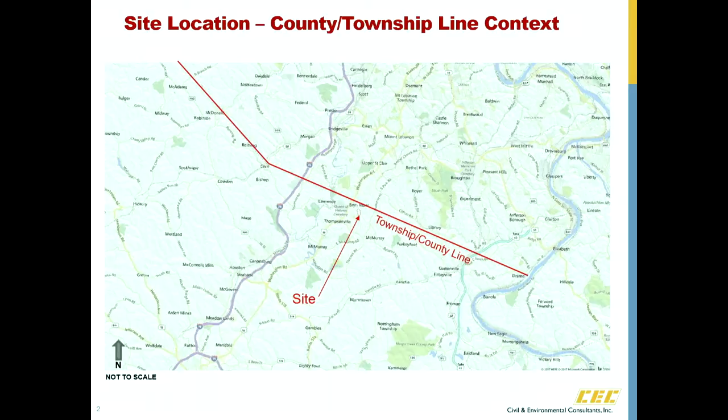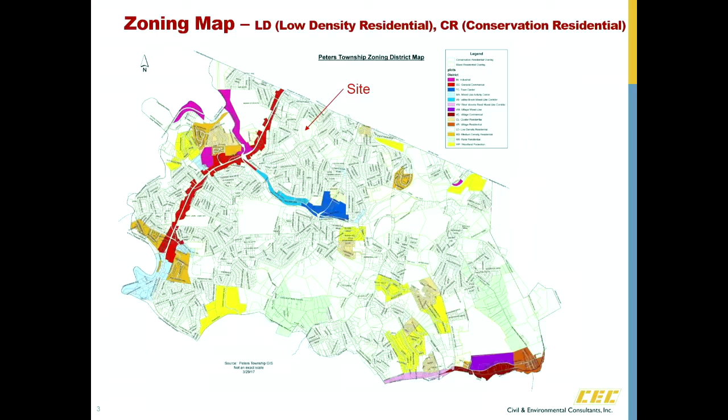Thank you, Ed. Thank you, commissioners, for having me here tonight. Once again, my name is Bill Moldvin. I represent Woody Welsh, Briarwood LLC, in the land development approval process for the Juniper Woods residential subdivision. Quickly, I wanted to refamiliarize everybody with the location of the site. The site is on the northern end of Peters Township at the township and county line, Upper St. Clair, Allegheny County, Washington County, right here. On the zoning map, as Ed mentioned, the site is in the low-density conservation residential overlay district, and this is the parcel of land right here, 30.4 acres.

Existing conditions. This is north orientation. South is here on the southern end of the property, Thompsonville Road. The northern end of the property is the Beacon Manor plan. Existing conditions, primarily wooded. There's an existing gas easement bisecting the property from east to west, and then the southern portion is woods and open space lawn.

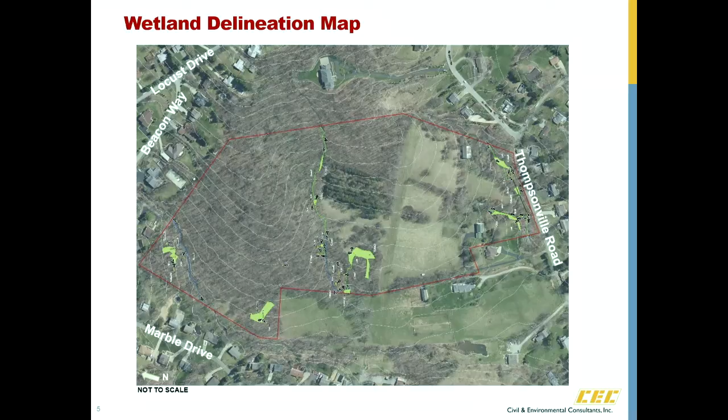We did do a wetland and stream delineation, which found multiple wetlands on the site and 7 streams. We've designed the plan to have one impact to a de minimis wetland, which is below 0.05 acres. That's going to be impacted with one of our road crossings, and we're currently in the permit process with DEP to have those stream crossings and the wetland impact permitted. And topography, the high side of the site is on the eastern portion, and it heads down towards the western side. So you can see we've got a pretty significant elevation change from east to west.

Zoning information, I think we've covered that. Property is 30.4 acres, as I said. We're proposing a yield of 60 units. Option A in the Conservation Residential Overlay District requirement states that we have to have 25% of our gross site set aside as permanent open space.

We're providing 11.08 acres gross area, and I put in parentheses the previous plan, the preliminary plan. When we came in, we were at 10.95 acres of gross open space. We've increased that by about 1/10 of an acre, and our net acreage of open space is 9.35. We were at 9.02 in the preliminary plan, so we're up almost 1/3 of an acre, and that net area is calculated from the gross minus any of the areas encumbered by easements.

Site design requirements, we've chosen to use the narrow right-of-way configuration in the zoning ordinance, which measures 40 foot from back of sidewalk to back of sidewalk. We're looking at sidewalks 5-foot width, both sides of the road, except for the locations where we are crossing streams to limit the impact to those streams, basically minimize the length of pipe culvert for those streams in conjunction with that crossing. Front yard setbacks are 20 feet, side yard setbacks 7.5-foot minimum, and corner lots are at 15 feet.

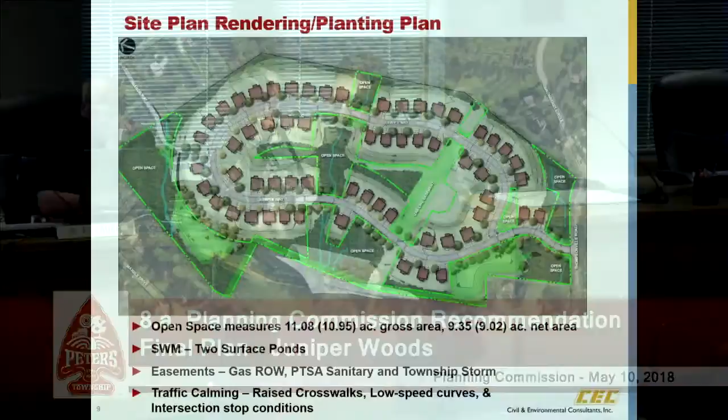We had initially assumed the 50-foot assumed floodway on either side of the stream, and found that going to DEP with those impacts was going to look unfavorable, and we were able to do a preliminary hydraulic and hydrologic analysis on the streams to determine the actual floodway or floodplain, and it varies from location to location. I think we had maybe 26 cross sections throughout the site, but at that location, where the stream comes into the property from Beacon Manor, our floodplain was less than 10 feet, so less than 5 feet on either side of the stream bed.

And we did work with the township to develop multiple concepts that either graded on both sides of the road or had a retaining wall on both sides of the road, and considering DEP's permit requirements, the most appropriate way was to grade on one side and install the retaining wall on the other. I guess my concern is it feels very narrow. If this has been reviewed by staff, fine, but it just feels very narrow, and I'm concerned when we actually build it what the impacts of that street will be. And if something tips us into a DEP permit, that's obviously a very significant permit.

Yeah, and we've actually met with DEP prior to submitting the permit, had a pre-application meeting to discuss the project as a whole, specifically the Manor Way connection, and got their feedback on what they were looking to see to stay outside of that DEP permit process. I just see that note, road connection to Manor Way to be coordinated with the township. Makes me nervous. We're going to be on the hook for something. Makes you nervous, why? Just for permitting and constructability of that retaining wall. Just want to make sure we fully vetted that roadway, that it's going to be constructed and we get the permits for it. We're in that process now. Okay. Key moving forward will be working with the property owners.

I think a few sections perpendicular to the center line would be very helpful to understand. We have all of that as part of our permit application to DEP. We have cross sections at every crossing, both in line with the stream and perpendicular to the stream. Specifically, I'm concerned that the stream we're encapsulating with a retaining wall that has a return on it is really going to act like a big catchment for any debris. And we know we have difficulty cleaning out those culverts, and that could be an area we're constantly maintaining. So point out where that stream's being encapsulated on that map again. Right in this location. About how many feet? This one's between 90 and 100 feet.

And the culverts have been designed to convey the 100-year storm without causing any water backing up onto adjacent properties. Retaining wall as well. We've discussed a cast-in-place concrete retaining wall and a segmental block retaining wall with geogrid. From those catch basins there. Yeah, it's extending it. And that's just about perpendicular to the flow of that stream.

So are these homes on pads or are they going to have basements? Some will have basements. Well, no, they'll all have basements. I apologize, they'll all have basements. So has this area ever flooded before? Manor Way area? Except on that stream, down on the vacant land now, the wooded area. I'm not aware of any major flooding issues on Manor Way. Never. Never, as long as I've lived in one. These are all small watersheds as well. They're less than 100-acre watersheds to all of the streams.

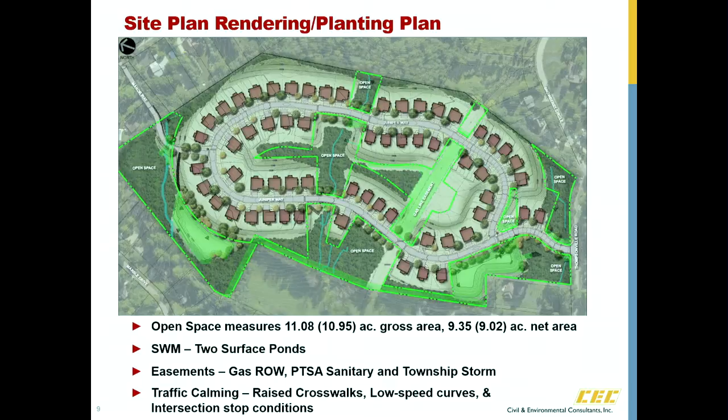And they have been good about trying to preserve what we have in regards to the environment, not encapsulating the entire stream. Still concerned about the number of vehicles. This was brought up at the council meeting, about a right-of-way that was originally there that supposedly doesn't exist, but it does. If you look at open space, I'll just point to it. When Manor was put in, this right-of-way was left there but never accepted. Is that correct? Correct. So nobody owns this. It's been 35 years. Its intention was to do exactly what we're doing here.

Just a what if? I don't think so because of the topography and the environmental constraints. There's wetlands. I don't know. There is wetlands there, I grant you, but I don't know that we would be permitted to make that connection under DEP rules. So you don't know. I don't think it would be used, even if it was available.

Okay, well, if you can put up the one graphic, Bill, that shows the wetlands and that spot. Sure thing. Nope, back. Okay. I don't know that this shows the wetlands. Yeah, it does. Wetlands here. Okay? This is the right-of-way right here. And you're going to plan a culvert of 100 feet, correct? Yes. It's going to be like right here to accommodate the road on the map.

The culvert is going to be 100 feet by 70 feet or whatever it is. If it's possible to slide this culvert down a smidgen so that the road can bifurcate, the culvert becomes an intersection, and now you access a right-of-way. I'm not an attorney, I just fixed them.

But I did find this, Sabotis versus Carley, PA 258, 1978. I'll just get to the conclusion: mere non-use of a right-of-way by its holder, no matter how long continued, including 21 years, cannot manifest an intention to abandon the right, because there's no legal obligation upon the right-of-way owner to use it in order to keep his title to it. We don't own the right-of-way. But there is precedent, and there were several citations here, that even if you didn't use it and didn't abandon it, that doesn't mean you can't get it.

I'm going to disagree here, and the only reason I say that is that we have asked our solicitor to look at these questions of these right-of-ways, and there is no question that the township has no ownership interest in it, and that right-of-way that had not been accepted by the township has reverted to the adjacent property owners. What Mr. Kittleberger is correct about is the township could, if it wanted, condemn that property, but I got to tell you, as a matter of public policy in Peters Township, council is loath to use its powers of eminent domain. And so I really do not see that as a viable alternative right now.

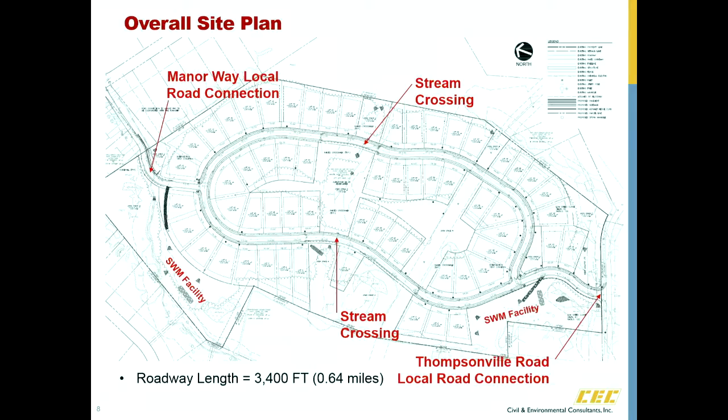Everybody's been very reasonable with regard to these discussions, and one of the things we discussed with the property owners, when you look at where the cartway is, the existing roadway and the existing right-of-way and people's properties, is that we're going to re-record a new plan so that right-of-ways line up with cartways, and property that the township has no need or interest in retaining can get back to adjacent property owners. And I think when we're all done, everybody's going to be pleased with where we end up. Thank you.

Any other audience comments? Can we get a motion, please? I have a question before the motion. The other departments are really on board with this, aren't they, to be able to access the township? As a planning commission, I think we need to incorporate not only the public, but also the departments of the township and how easily they can access different roads. And I haven't heard any safety issues tonight. There aren't any red flags. Am I missing something? No, I don't believe so.

The perfect example of what you're referring to is snow removal, when you have to leave the community and pass through Upper St. Clair to be able to plow streets. It not only impacts our ability to deliver service to that neighborhood, it impacts our ability to timely provide service elsewhere. You have received in the past letters from the police department, the fire department, and the public works department, all believing that making this interconnection will enhance their ability to deliver service. Okay, thank you.

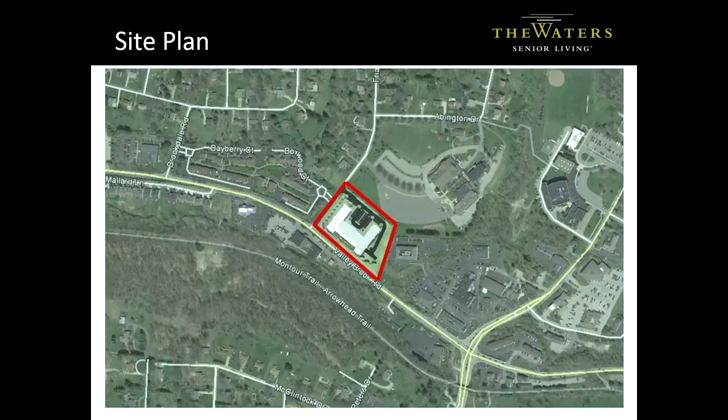Good? Grant Shiring with PV, representing the Waters Senior Living. The image that you see on the screen right now is what Ed was referring to as the 0.08 acres. That's for future roadway expansion if it does occur. When we were here a month ago, we went through, I think, some pretty thorough detail in the site plan. Amongst multiple questions from the Planning Commission, we heard one clear item that needed to be addressed, and that was pedestrian connectivity. Ed has really been helpful in leading negotiations and discussions with St. Benedict's to try and make a connection to their property.

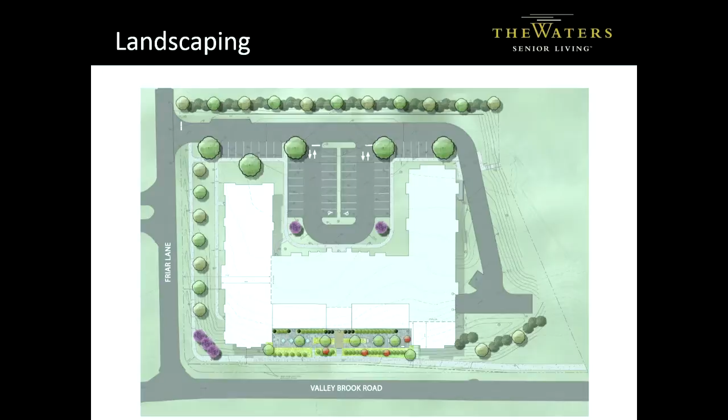And where that connection is proposed to occur is right here where we had discussed along Friar Lane. The reason we had not shown that on the previous plan, if you could recall, is that we were going to need to grade onto St. Benedict's property in order to make this a walkable option. It was going to be too steep if we could not grade onto their property. So as we understand, St. Benedict's is willing to work with us to permit that grading to occur so that we can have a relatively flat sidewalk that can be walked over.

So, we have received the comments from both Gateway and the Township. There is nothing in there that's a red flag to us. We believe those are technical comments that we can address, resubmit plans back to the Township. Other than the 15th condition that we'll probably hear in a moment here, we have nothing else to add to that, and we'll just answer any questions that you have.

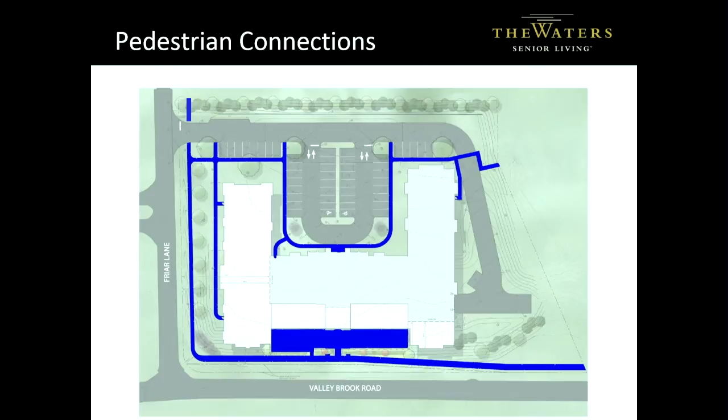The 15th condition is, in our zoning ordinance under site plans, we require developers to provide the township with documentation that they have the financial capability to do what it is that we're approving. So the 15th condition would read, the owners provide the township with evidence of their financial capability to carry out the improvements related to the approved development prior to the issuance of a building permit or site work commencing. That would be the 15th condition in the site plan recommendation. And that's acceptable to us as well.

I know we've been through this plan a lot last month, so I don't know if there's any other commissioner comments on it. I don't have any. I just want to say thanks for addressing that connectivity issue before this one. Ed helped us out with that. You got to thank Father Bob, St. Ben's. Good. I will be.

Any audience comments on this plan? If not, can we get a motion, please? I'll make a motion that the Planning Commission recommend approval for the Waters of Peters project, land development plan according to the memo dated May 4th, 2018, along with the 15 conditions. I'll second that motion. All in favor, say aye. Aye. Thanks, John. Thank you, everybody.